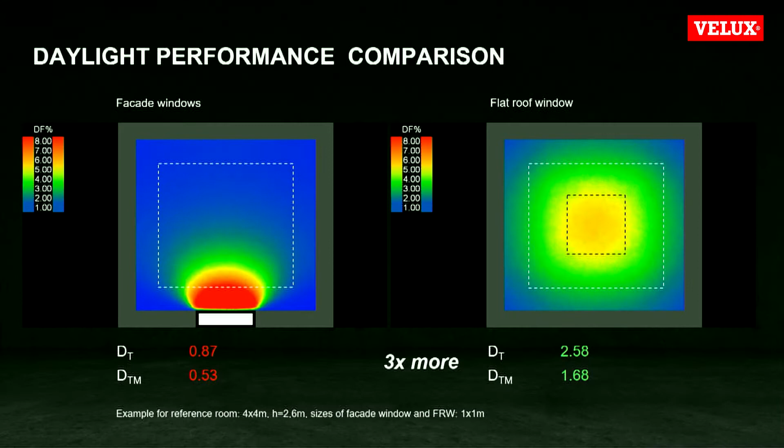We can prove that also via calculations, which you can see now on the picture, that within the same room, the same size of the facade window and roof light, you can see the huge difference of the daylight factor provided by those two different roof and facade openings.

We saw calculation, but what does it mean for a real apartment? We really need to focus in a real apartment on the work we need to do for dining, cutting, eating, reading. We need to provide the daylight to the place where we are using the daylight. We need to focus really on these special places.

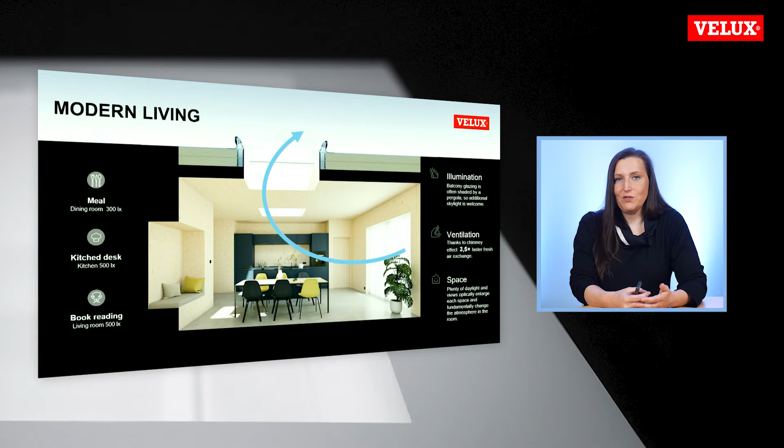But not only the daylight, but also fresh air is important. And if we are using this opening of the roof for ventilation, the stack effect helps us to be 3.5 times quicker with the air exchange. And of course, we can enlarge the space via this view out to the sky or to the surroundings.

And now is the time to show why we are here, what we are going to present you. We would like to present you our new generation of glass roof lights, which is the Red Dot winner of 2021 in the category of product design. You can see it's really minimalist glass-to-edge design, and a very beautiful product.

This product was made to deliver the maximum of daylight. You can clearly see how we enlarged the glazed area, and now we are able to deliver 56% more daylight to the room than with the previous generation. Not only daylight, but also this really state-of-the-art design is provided with this product. You can see that from the interior, but also from the exterior, it is really aesthetical. All these hidden blinds and accessories also help us to provide really minimalistic design for your project.

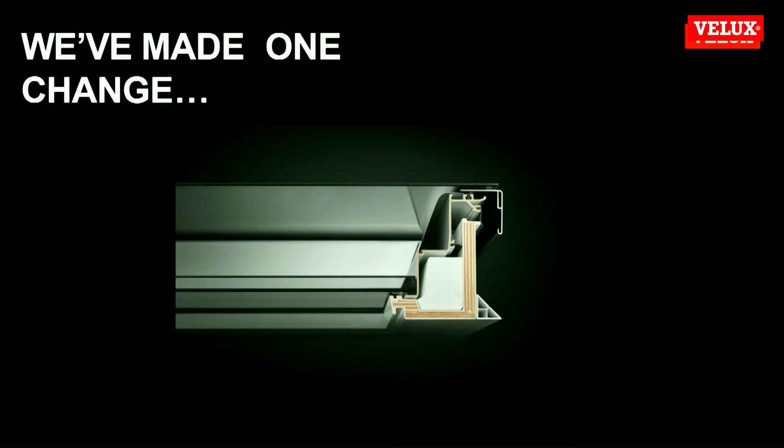Design is not everything that is necessary for the building. We also produce really superb indoor comfort. And this is not only the energy performance of those products, but also excellent sound reduction, which those products have. And all of our vented products, but also the accessories, can be automated to create perfect indoor climate in your projects. So, how did we do it?

We made one small change. We changed everything. You see, we have a new glass-to-edge top unit. We have an invisible, really thin glass fiber sash. We have a polyurethane frame with a wooden core. We have special thermotechnology with a hidden silent motor.

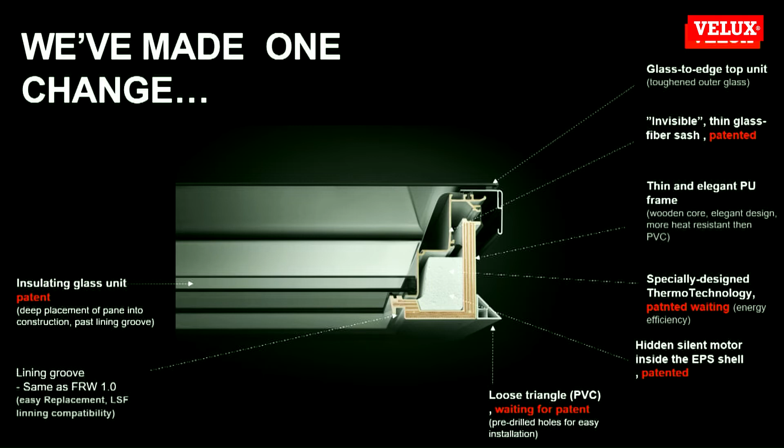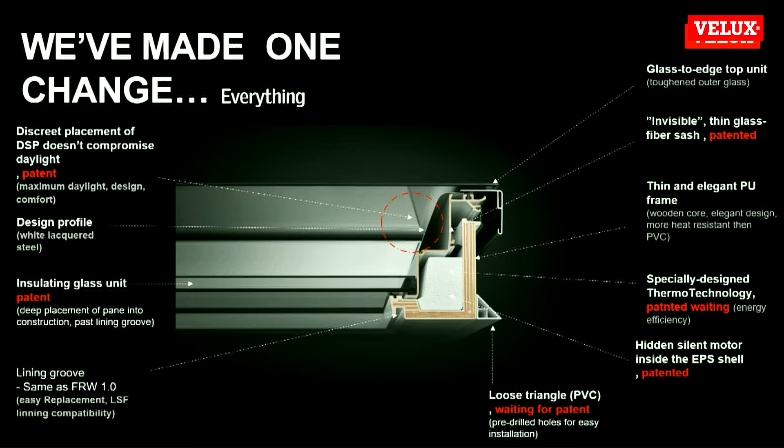We have all the accessories which help make the installation much easier. And also we have insulating glass units which we can offer in double but also in triple glazing. And all the profiles are really designed for this minimalistic approach. So, a beautiful product which completes our flat roof window portfolio.

I would like to very quickly go through the portfolio to show you that we have products for any type of your projects. We are starting with the basic dome, which has to be used for uninhabited buildings, for light commercial. We are coming through the dome with glazing, which is the product which you already know and we had in our product portfolio before. And we have two newcomers, this design new generation flat or curved glass roof lights.

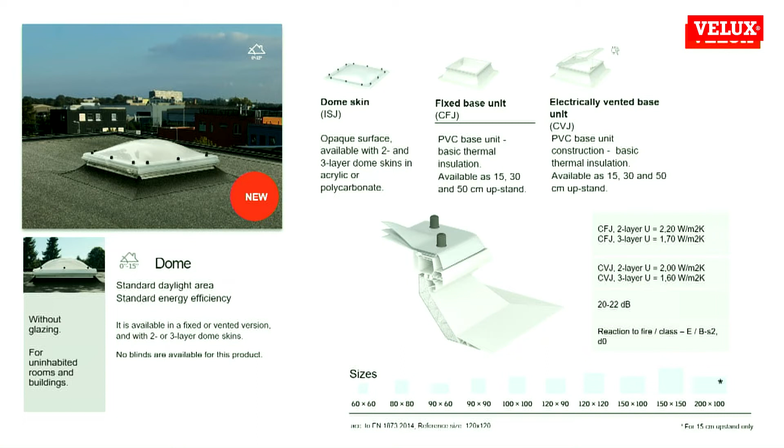Coming closer to those projects and starting with the basic dome. The basic dome we are offering with a fixed base unit or vented base unit, and on top of this base unit is used an opaque dome, which can be double or triple skin. And you can see that we are offering a really wide scale of sizes, from 60 by 60 to 2 meters by 1 meter. This is the standard product, and within this standard product, we do not offer any accessories or blinds or shutters.

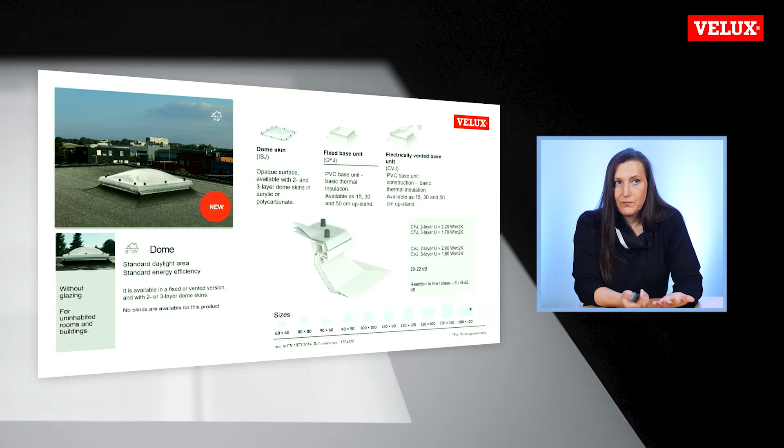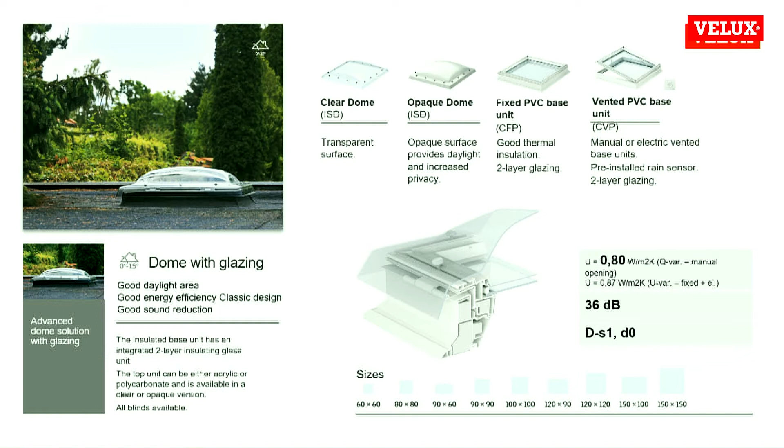If we come to the little bit higher category, we are coming to the dome with glazing. This product, again, consists of a vented or fixed base unit, made from PVC, and you can choose from an opaque or clear dome. The base unit is provided with double glazing. As this product is used in residential or office buildings, here we are offering some heat protection and daylight control accessories. We are talking about anti-heat blinds, but also blackout blinds or soft lighting blinds, which can produce some diffuse light to the building.

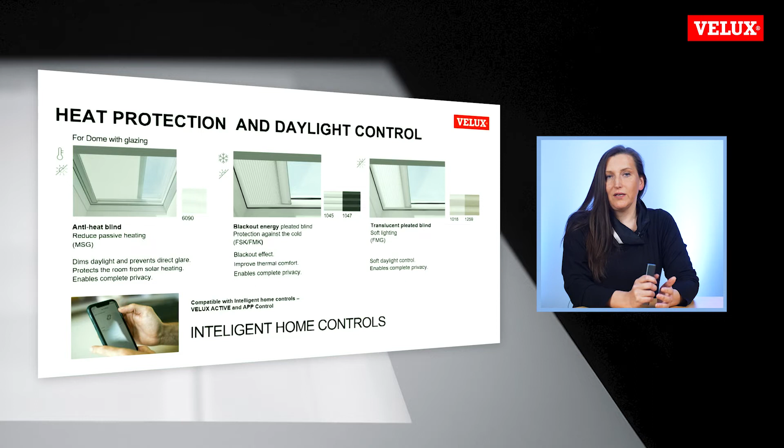As this product has to be used in residential, offices, schools, we need to provide sun protection, but also daylight control. Therefore, we offer anti-heat blind, blackout blind, but also a soft lighting blind. All these blinds are remotely operated, and all of them together with this vented base unit you can include to VELUX Active or app control or any type of smart home system.

And now we are coming to our newcomers, our new product portfolio. And we have here this red dot design winner flat glass roof light. Here we can see that the product has this maximum daylight area, excellent energy performance with the U value like 0.6, really great design and excellent sound reduction on the level of 39 decibels.

Also here the system works so that we have two bases, vented base and fixed base, and this flat glass top. Within that, we can offer 2 or 3 layer glazing units. Here I will draw your attention also to the sizes, because even when it's a glazed unit, we can offer the size up to 200 by 1 meter, which will be available on our markets from September.

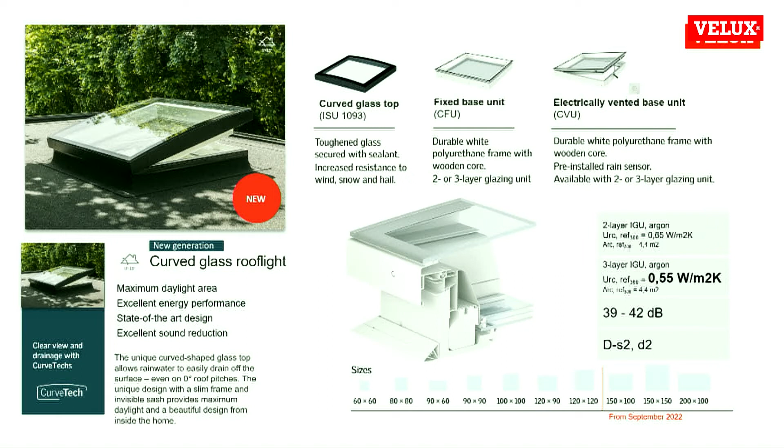What is really great, what we can see here, is that we have really a product for design spaces, designed houses. And also these products are provided with accessories. We are talking about the solar blind for heat reduction. We have also the solar blackout blind. And within that generation, we are coming also with the insect screen for flat roofs.

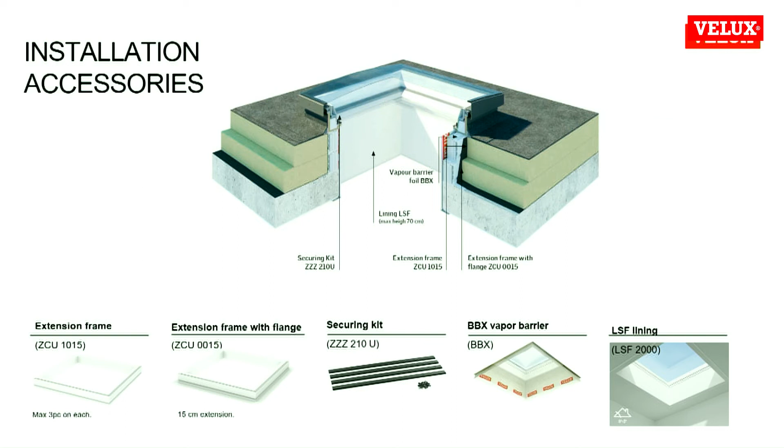And talking about the installation, it is a very important part of the satisfaction with the product as it is. And we serve quite a load of accessories to ensure the easy and safe installation of our products to flat roofs. Within the construction, when the insulation is above the bearing construction, we are offering extension frames where we can go even up to 70 centimeters to lift up the product above this insulation part.

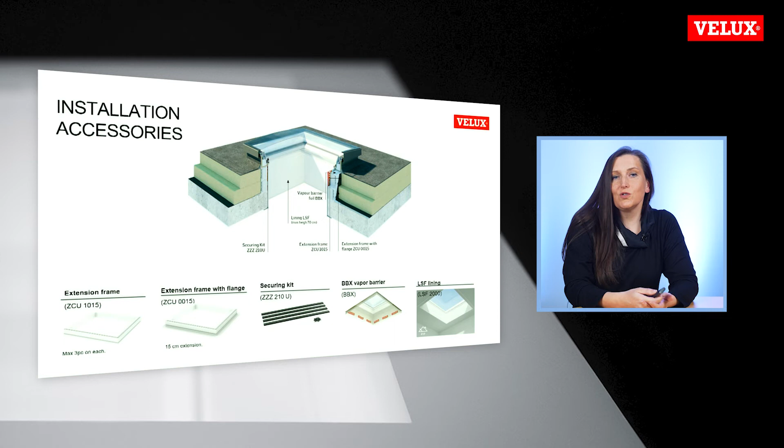We are offering securing kits to secure the roofing felt to fit to the product. And a very important part is the system vapor barrier, which is concretely designed for each product and secures the perfect installation. And we have also the system lining, which you can use in your projects.

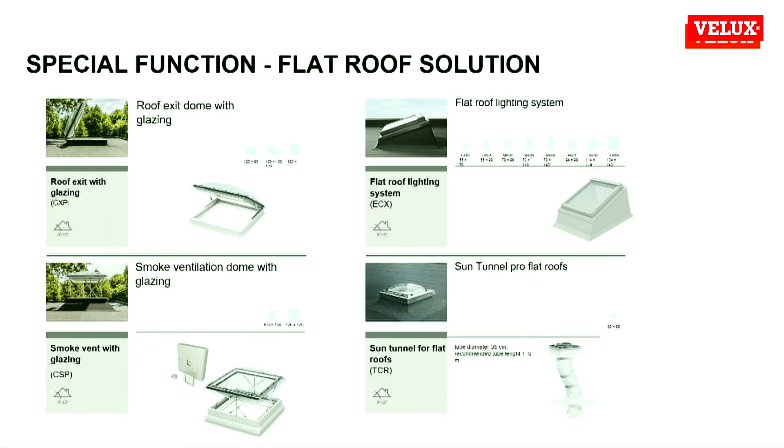Not only the standard products, but also special functions sometimes have to be included in the projects. We are talking about the roof exits. We are talking about smoke ventilation systems, but we are also talking about sun tunnels. An overview of all these special functions you will find on our web pages.

So, if I would like to make a very quick product portfolio summary of technical values, as you already heard, we are starting with the basic dome, which starts at a U value on the level of 2.2. We are running through our portfolio up to 0.55, which is a really outstanding value for this product category. And also the decibels, which we can provide starting with a reduction on the level of 22 decibels and running even up to 42. Then you can really easily choose the type of product which fits the type of your project.

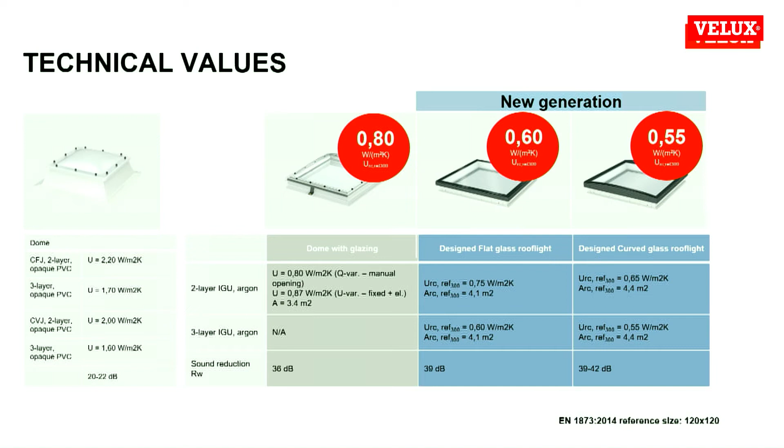If I would like to sum up, if we are talking about family houses, where our products usually end up, we usually use the top light in the kitchen, in corridors, and in bathrooms.

And talking about daylight and daylight design, sometimes we need tools which will help us make the design better. Here we are offering a tool which you can download for free from our web pages. The tool is called Daylight Visualizer, and it offers loads of different outcomes.

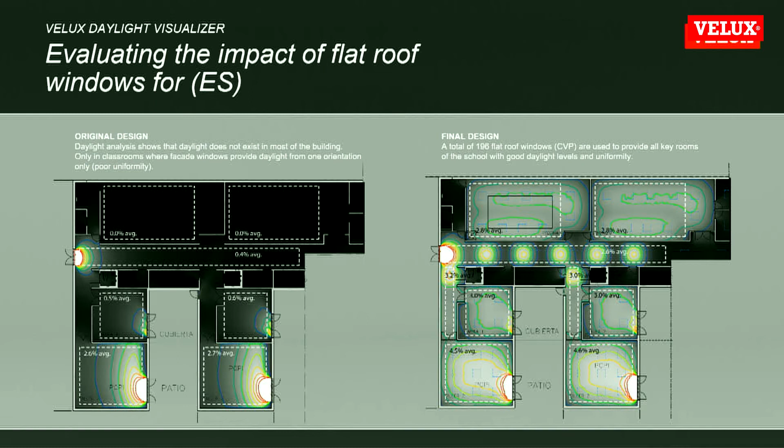You see that these top roof lights really deliver enough daylight to fulfill the standard need of the daylight factor. And in reality, the artistic part also has to be considered: with the play of the light and of the roof and facade openings, you can really provide enough design for the roof.

So, more or less at the end of the first part of our presentation for today, I would like to highlight the digital tools we are offering. As mentioned, the Daylight Visualizer. We also offer the Energy and Indoor Climate Visualizer, a tool which helps us create a good indoor climate. You can calculate how much energy you save on cooling if you are using external shadings, for example, and so on.

And all the products I showed you today, you can download as a BIM object or 2D drawing for your project. And now I'm making a small spoiler. I would like to switch to my colleague in the workroom. Here you will see the products we talked about in real life, and he will talk a little bit more about the installation, but also about home automation.